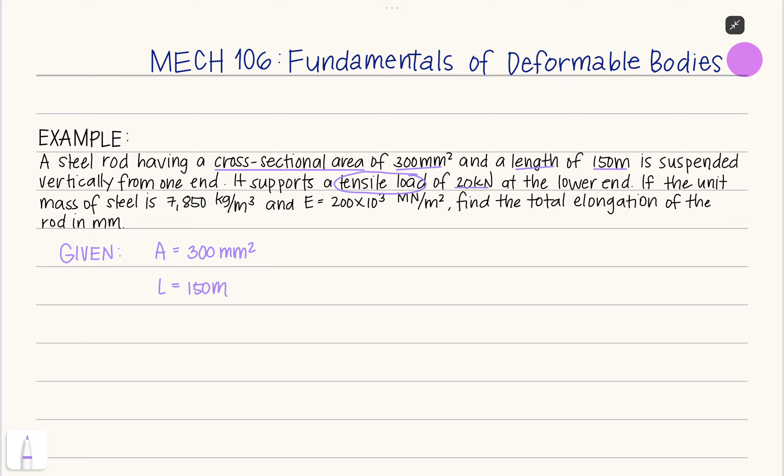It is suspended vertically from one end. While reading this, try to imagine the rod. It is suspended, and it supports a tensile load of 20 kilonewton. So this is obviously an axial load, it could be tensile or compressive. For this one, it's a tensile load, denoted by P. So P is equal to 20 kilonewton.

If the unit mass of steel is given as 7,850 kilogram per cubic meter, that unit mass, or what we call density, is denoted by rho. We have kilogram per cubic meter, which is mass per volume, so that is density. So rho is equal to 7,850 kilogram per cubic meter.

And also, the modulus of elasticity is given, denoted by E, equal to 200 times 10 raised to 3 mega. Newton per meter squared is Pascal, so let's just put mega Pascal.

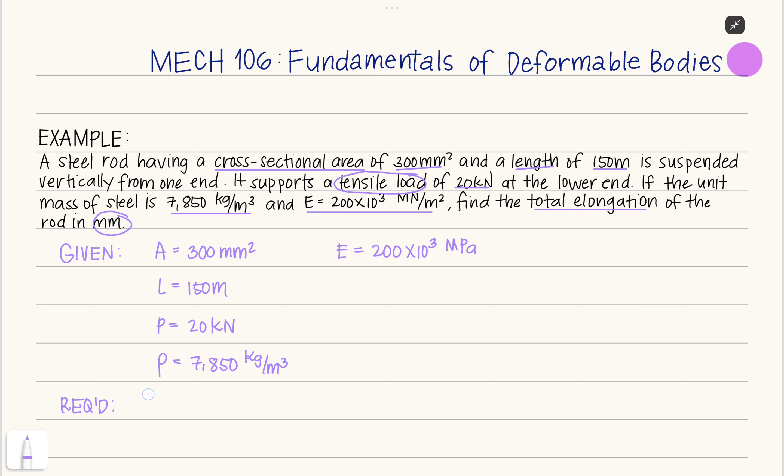Find the total elongation - this is now the required. We need to get the total elongation of the rod, and take note that it should be in mm. So our required for this problem is the total elongation, or deformation, denoted by this symbol. Let us denote this as total elongation of the rod, in mm.

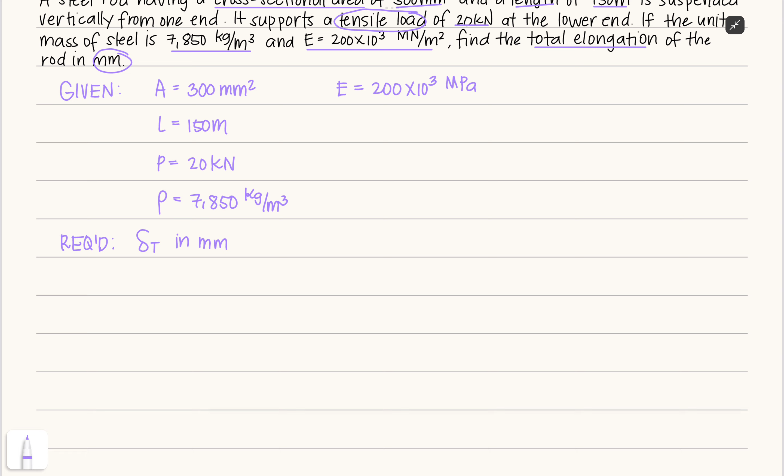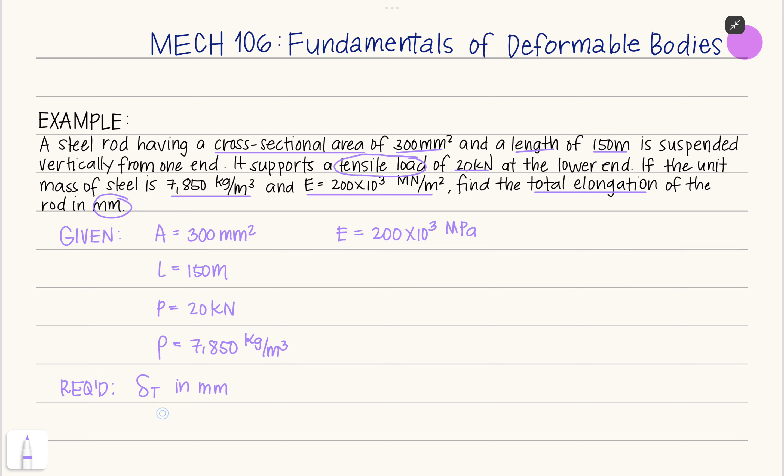From the term total elongation, we can infer that the cause of elongation might not just be one - it could be two or more. That's what we want to determine, so we know what our working equation will be. So for our solution, the total elongation is equal to whatever causes the elongation on the rod. Let's try to draw it first.

What's being described here is like a suspended ceiling. So this is our rod, suspended - that's how it looks. Now, what could be the effect causing elongation on our rod? There is a tensile load, so that's one cause. Due to tensile load, this will be our force P, since it says the rod is suspended vertically from one end and supports a tensile load of 20 at the lower end. So we position P at the lower end - that is our tensile load P.

So therefore, for our total elongation, there will be an elongation due to the tensile load P - that's one. What else could it be? Another cause is the weight at the center of the rod. Take note, it's at the center. This is also a cause of elongation, due to its own weight. So we add these together to get the total elongation, due to the tensile load and due to its own weight.

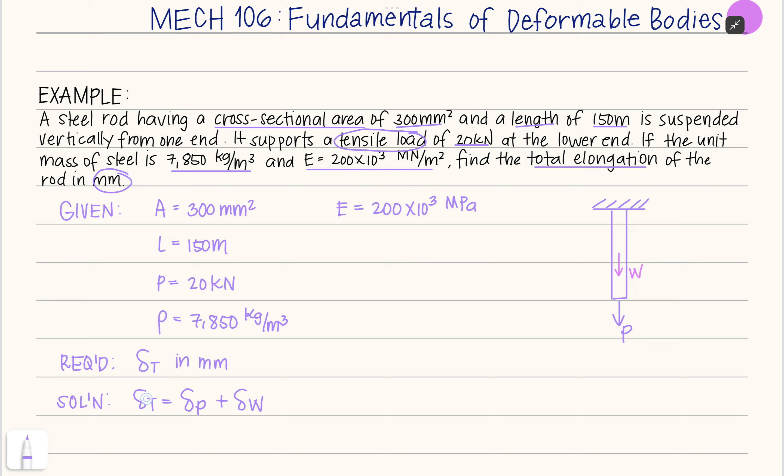If there's no other cause of elongation, then this will now be our working formula for this problem. Since this is our working formula, we will utilize the formula - deformation is now equal to PL over AE. That will be our working formula.

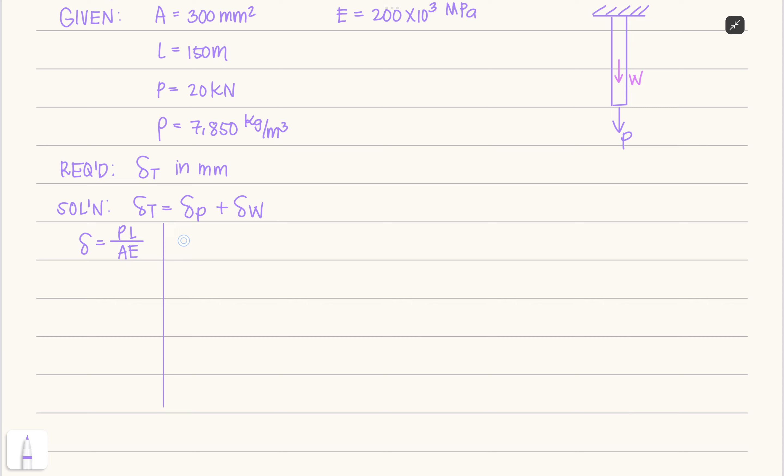So now, to get the value of the total elongation, first we need to know the value of the elongation due to the tensile load and due to its own weight. Let's start with the elongation due to its own weight first, denoted by this symbol.

So, ito muna yung kukunin natin and that is denoted by deformation W. So, let's utilize this formula. Ibig sabihin, kapag due to its own weight, yung magiging formula natin para specific, that is now due to its own weight is equal to yung magiging force natin. Okay, so ito, yung figure natin, ano na siya? si W na, tama? So, W na yung force natin, and then syempre, yung length natin over area, and then modulus of elasticity, E.

So, from here, tignan natin si L, given naman na. So, we have no problem for that. And also, A is given, also E is given. So, yung problema na lang natin para masolve natin yung deformation due to its weight is the weight itself.

Okay, so ano yung formula natin for the weight? Solve for weight W. Di ba we know that weight is equal to mass times the gravitational acceleration G. Pero yung problema natin, sa given na to, wala tayong mass and G, wala naman tayong problema dyan kasi we know that G is equal to 9.81 meters per second squared, that is constant. So paano natin malalaman kung anong M natin? Wala naman siya dito sa ating given. So kailangan natin i-utilize ito or gawan ng paraan para may makuha tayong mass.

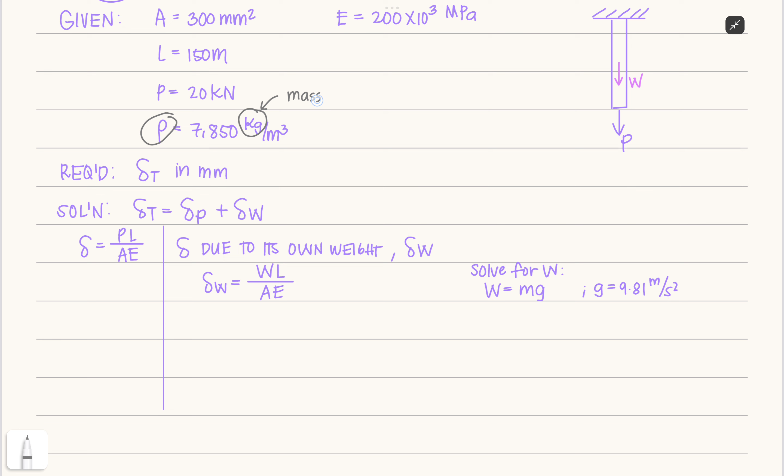Or if ever man, let's try to look at our given by unit analysis. So yung rho natin, di ba, kung titignan natin kahit wala tayong makita na M dyan, we know that yung kilogram is a unit of measurement for mass M. Tama? And then yung cubic meters natin is a unit of measurement for volume V. Therefore, from that, we can generate an equation that rho is now equal to mass M over volume V. Okay, so from that, may nakita na tayong M, which is yun yung kailangan natin dito.

So by cross multiplication, M now is equal to rho times the volume V. But then again, may problem ulit tayo kasi kapag ito pinag-in natin dyan, wala pa din tayong value ng V kasi nga walang given dito. But again, there is an area and length.

Therefore, by unit analysis again, di ba, pag kukuha tayo ng volume that is in the unit cubic meters. And if we say that area, unit of measurement for that is naka-square siya, so multiplied by meters, we will generate cubic meters. Okay, nagigets yun? So yon. So that is now equal to, by that, we can now say that mass is equal to rho, and volume is just a product of area and your length L. So from here, may M na tayo which is equal to rho A times L, and all of this are given na.

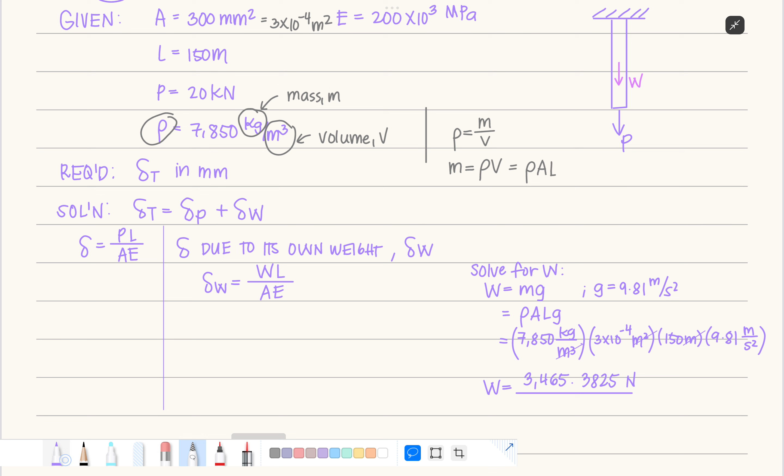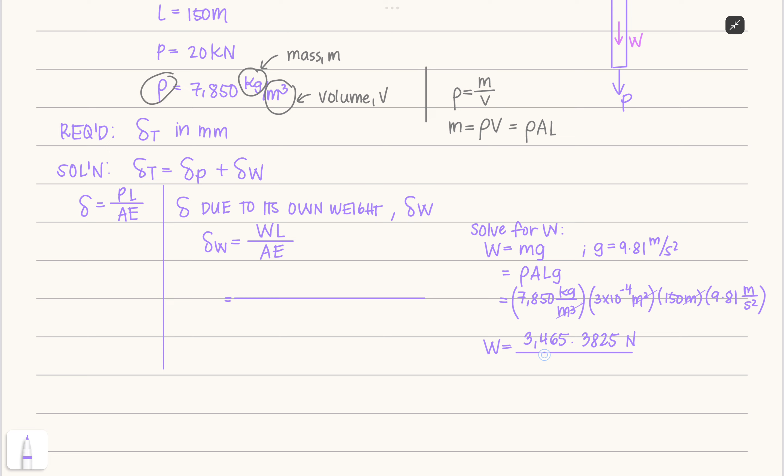So, eto, since nakuha na natin siya, plug in na natin dito for us to know the value of the deformation due to its own weight. So plugging in here is now equal to, so W, plug in natin dito, 3,465. Okay, so dapat naka-Newton siya.

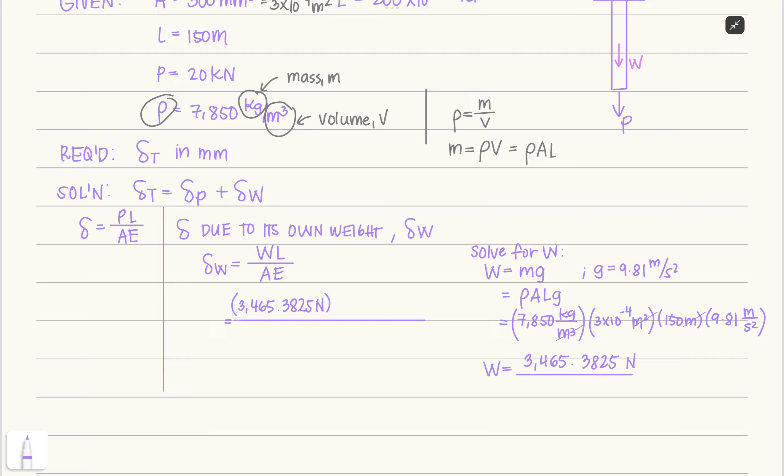3,465.3825 newtons. Then, length. Si E, ito, si modulus of elasticity, naka-megapascal. Diba yung convention natin ng unit of measurement, kapag megapascal ito, si force natin should be in Newton, tapos si area natin, dahil stress is equal to force over area, yung area natin is in mm squared. So that will be equivalent to megapascal.

So dito sa length natin, dapat i-convert natin si 150 meters. Pero wait, before that, si length na 150 meters ba yung gagamitin natin dito when we are considering weight? Yun yung question.

Kung itratry natin i-drawing, what will be the effect doon sa rod natin? Ito yung ceiling natin, for example. So try to draw yung magiging itsura ng rod once na may weight siya, or due to its own weight, ano yung magiging itsura ng kanyang deformation.

Yung magiging effect niyan, dito siya magkakaroon ng deformation sa taas. Kung ito yung rod originally, ito si rod natin originally, so of course yung length niya is ito, that is equivalent to 150 meters.

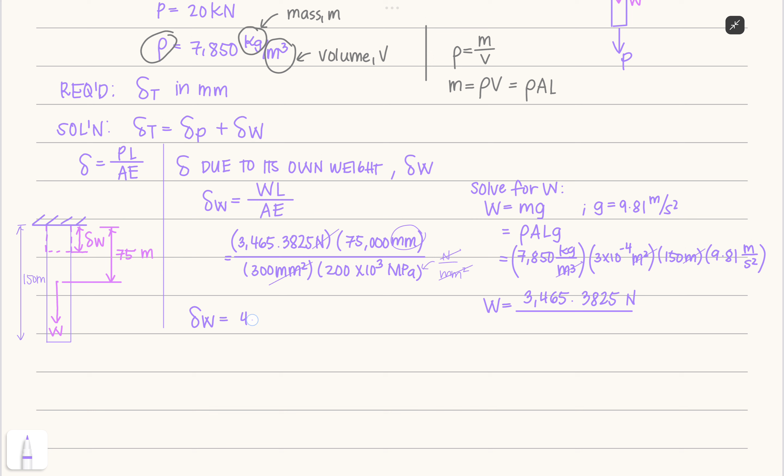Therefore, mm yung matitira. Kapag kinalculate na natin yan, ang magiging equivalent now ng deformation due to its own weight is now equal to 4.33 mm. Okay, yan pa lang yung due to its own weight, nakuha na natin ito. Kukunin din natin yung due to the tensile load para makuha natin yung required na total elongation.

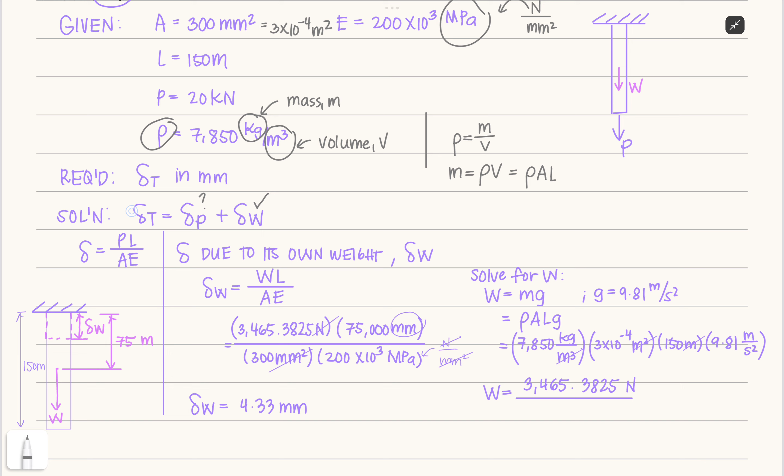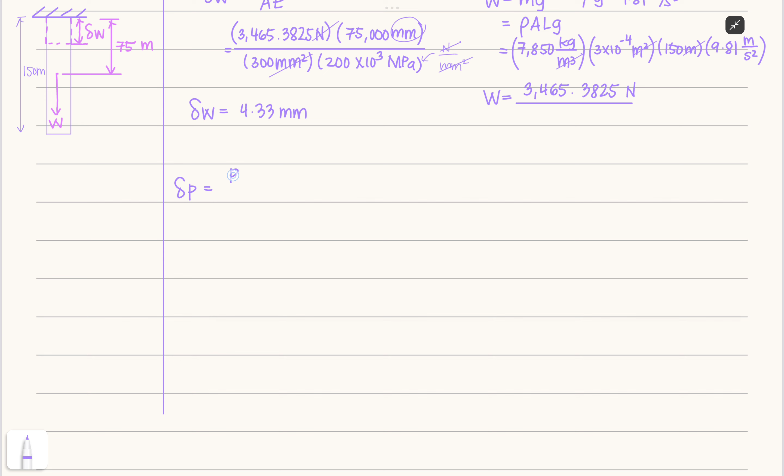Proceed tayo, dito naman. Let's solve for the elongation due to the tensile, that is of course PL over AE. Dito wala tayong problem kasi P naman is given, dapat maging aware lang tayo dun sa mga units of measurement na ginagamit natin.

So plug in natin si P, that's equal to 20 kilonewton, so this should be Newton, kasi yun yung mga unit of measurement conventions natin. Kilo is times 10 raised to 3 and then Newton.

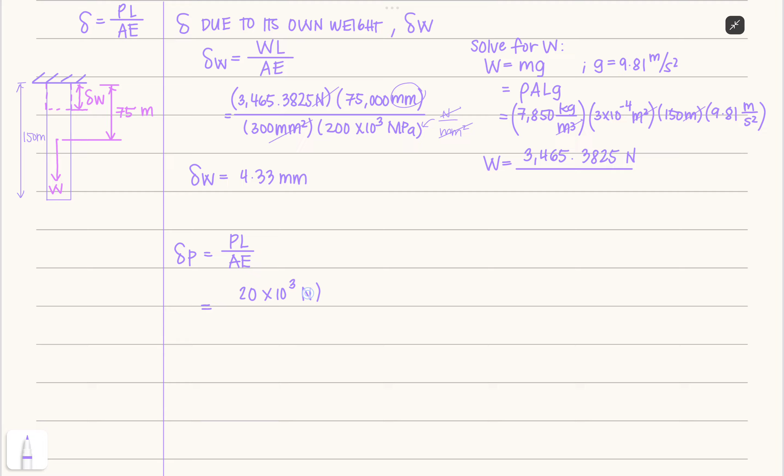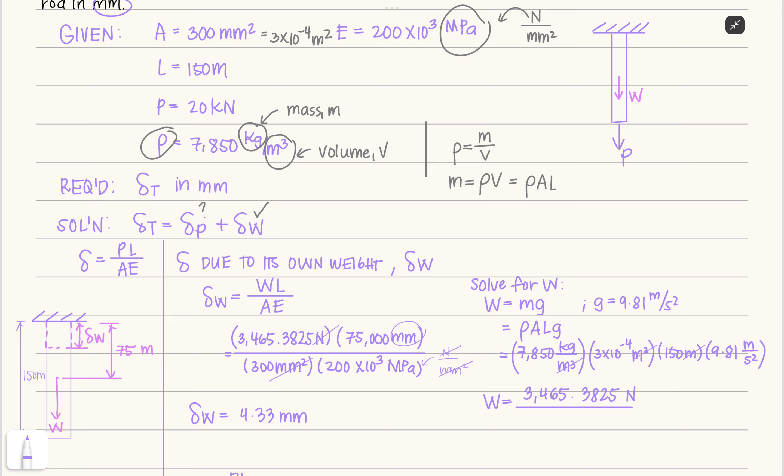So 20 kilonewton, and then L natin, this should be in mm kasi yung given na is megapascal para hindi na to i-convert natin. Just like kanina, naka-mm to. Yung gagamitin naman natin ngayon, try din natin i-illustrate. Kung ito, kapag due to its tensile load naman, dun sa tensile load, tanggalin ko lang to.

So kung ito, yung original rod natin, tapos yung i-consider naman natin is si, ito. So dito, at the end, dun sa problem, ito si tensile load natin. Tensile kasi palabas siya or pababa, okay? So yung magiging length natin na pipiliin, syempre ito. Kasi yung effect lang naman yan, dito siya mag-e-elongate. So parang dito, diyan siya mag-e-elongate.

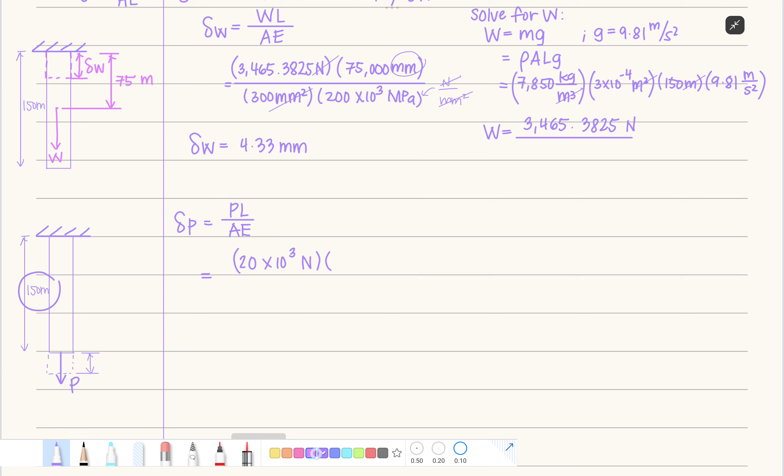So eto na si deformation due to the tensile load. Ibig sabihin, convert lang natin si 150 meters to mm, times lang tayo ng 1,000. So 150,000 mm, then all over A natin, walang nag-iba.

Since yun nga, we can apply that only to Hooke's law situation, and dapat hindi mag-change yung kanyang area, as per dun sa conditions natin na na-discuss in the previous lesson. So 300 mm squared, then yung E natin, that is 200 times 10 raised to 3 megapascal.

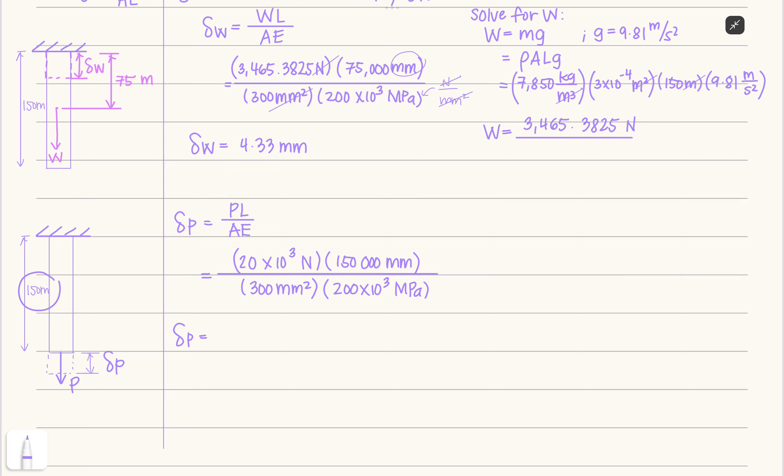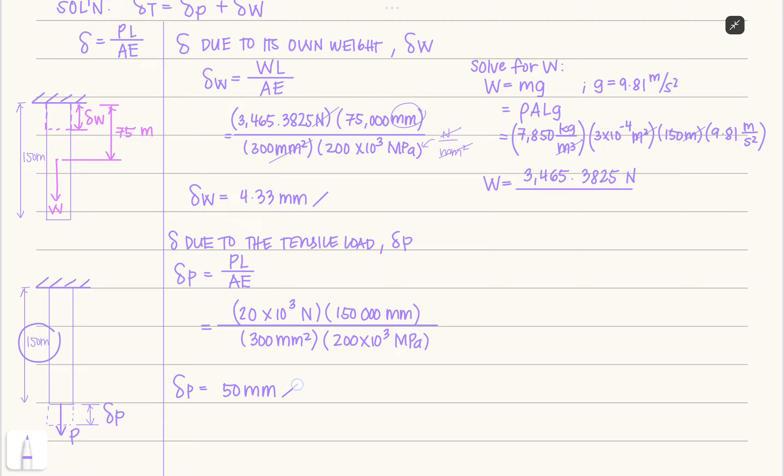So parang kanina, yung matitira dyan is in mm. So kapag kinompute natin, si deformation due to tensile load is now equal to exactly 50 mm. So since meron na tayong value ng due to its own weight, ito si deformation due to the tensile load.

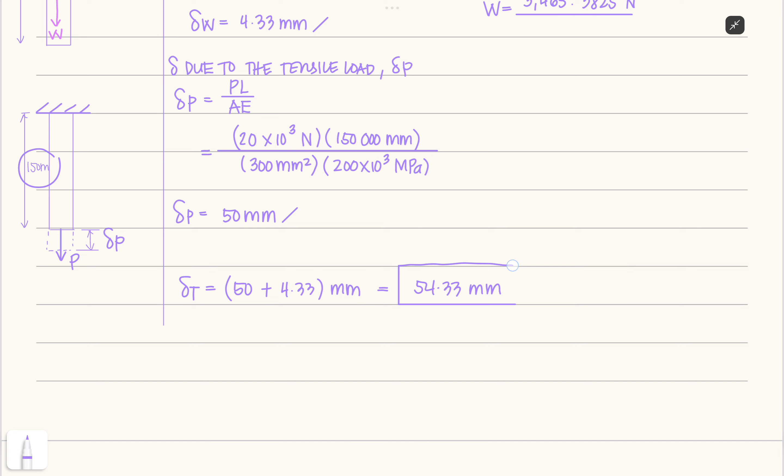And that is yan. Okay, so since nakuha na natin tong dalawa, we can now solve for the total elongation. So that's now equal to 50 plus 4.33, and this is both in mm. So computing that is now equal to 54.33 mm. So naka-mm na siya. So yan na yung final answer natin for this example.

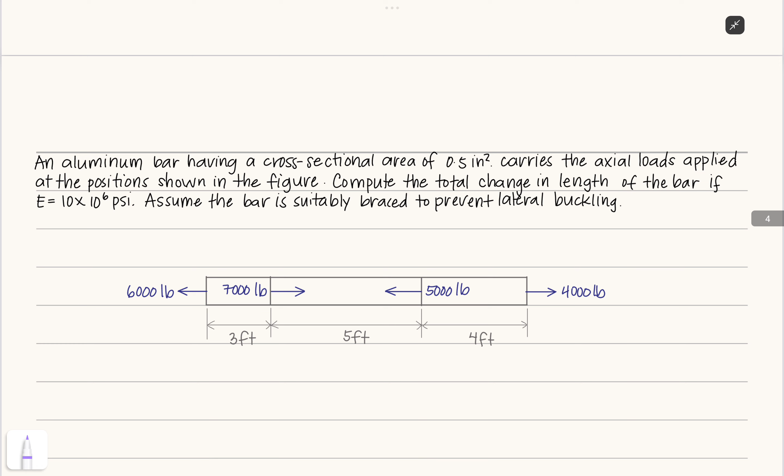Okay, so yun. Then next one, let's have another example. So dito naman tayo, sabi dito, an aluminum bar having a cross-sectional area of 0.5 inches squared carries the axial loads applied at the position shown. So yung sinasabi niya dyan, ito si 6,000, 7,000, 5,000, and 4,000. These are the axial loads na na-apply na sinasabi dyan sa problem. Then let us compute the total change in length.

So wag tayong malito dun sa mga terms. Let us familiarize na kapag sinabi nating deformation, change in length, same lang yung mga yon. So change in length of the bar if E is equal to 10 times 10 raised to 6, PSI, pounds per square inch. Assume the bar is suitably braced to prevent lateral buckling.

So kunin muna natin yung mga given sa problem na to. Sabi doon, 0.5 inches squared, and that is the cross-sectional area denoted by A. So A is equal to 0.5 inches squared, carries the axial load. So ito yung mga yon, yan na yan as per in the figure. Then also E is given: E is equal to 10 times 10 raised to 6 PSI, or pounds per square inch.

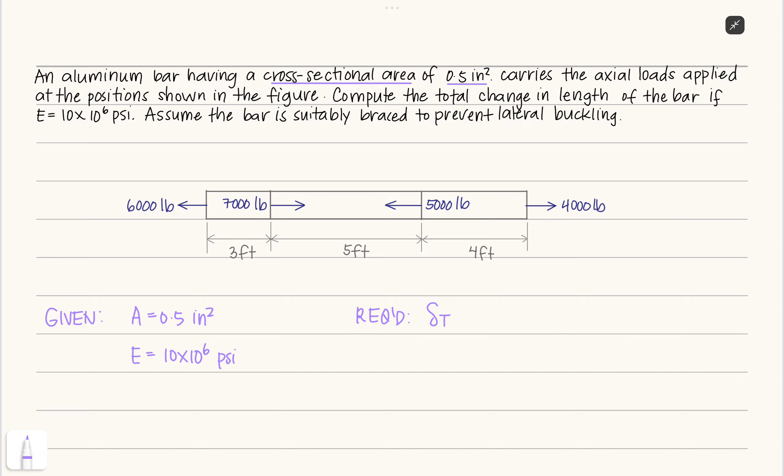Then yung required sa problem na to is the total change in length. So again, total, that is total change in length. So kung titignan natin sa formula, yung magiging working equation natin, di na tayo lalayo dun sa formula natin.

Ayan, so dito tayo mag-i-start, gagamitin natin to. Kung titignan natin sa figure, tama naman yung na-discuss natin under the conditions of Hooke's law na sabi doon is homogeneous, which is aluminum siya all throughout. So sa part man na yan, yung 3 feet na yan, 5 feet, and 4 feet, aluminum bar iyon. And then hindi siya nag-change ng area, which is all throughout 0.5 inches squared siya. Okay, so ngayon, ano yung magiging total change in length nito?

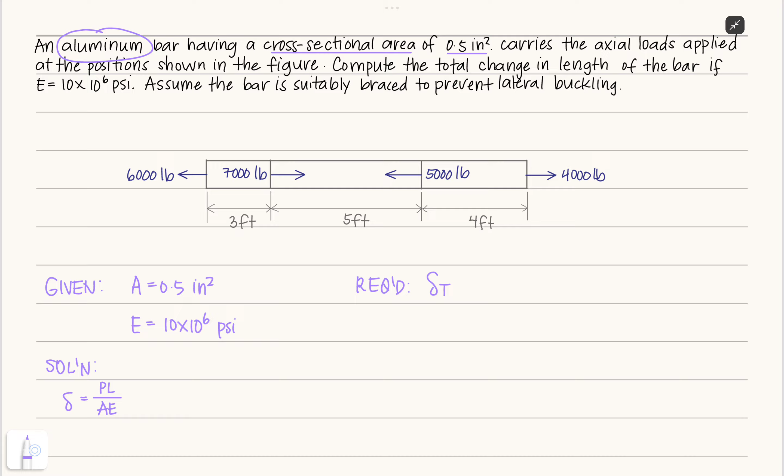So yung P natin dito, we need to know the internal forces dito sa each material natin. So per measurement, 3 sa 3 feet, 5 feet, and then 4 feet. So there are 3 portions, tama? So yung magiging equation na natin for us to get the total, since 3 parts yan, that is now deformation at 1 or at 3 feet plus deformation at 2 or 5 feet, plus deformation naman at 4 feet or that is 3.

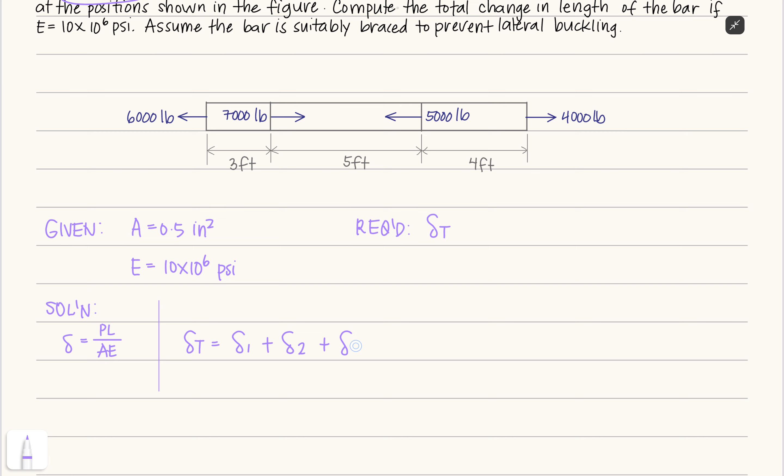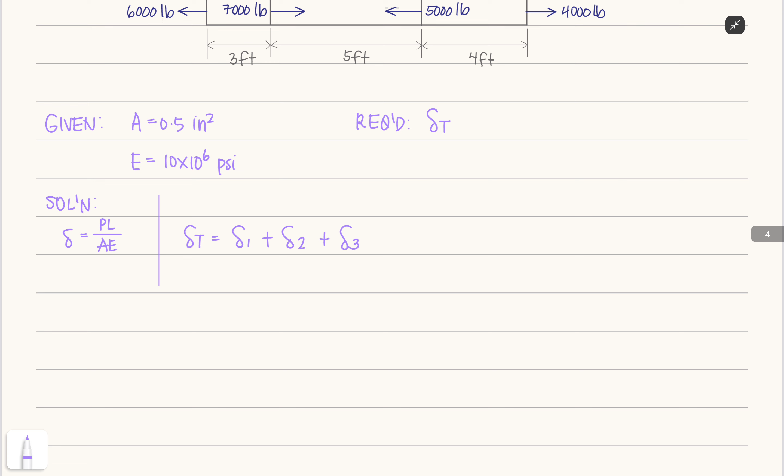Okay, so ngayon, compute muna natin each. Pero paano? Dito sa P natin, as per dun sa sinabi ko kanina, kailangan natin ng internal force. Okay, so kung titignan natin, unahin natin solve for deformation at 1. Kung try natin yun i-draw, so ito siya, dito sa figure na to, diba magkakaroon lang tayo ng internal force dun sa discussion natin in the previous sa axial or normal stress by cutting here. Tama?

So kapag nag-cut tayo dyan, tas try nating kunin yung isang part dito. Di na natin papahirapan sarili natin. Dito tayo kukuha sa side na to, dyan sa side na yan. So yung magiging itsura niyan ngayon is eto, diba? Eto yung portion.

So unahin na natin yung cutting plane. Ito yung cutting plane natin. Ito yung ginawa natin dyan. And since dito natin kukunin sa left side niya, para mas konti yung i-consider na forces, ganito na yung magiging itsura. So review na lang to kasi na-discuss na natin to sa previous lesson. Yan siya, diba? Ganyan yung magiging free body diagram niya.

And there is, tawag nun, load dito. Ay sorry, wait. So may load yan na 6,000. Lagay lang natin to since yung left side yung kinonsider natin. And dito na, sa portion ng cutting plane tayo, magkakaroon yung sinasabi natin na, tawag doon, internal force. I-denote natin siya, dito na lang. Again, depende doon sa direction, okay lang, as long as dun sa huli malaman natin kung tension siya o compression. So this is now, let's say, denote natin as P1.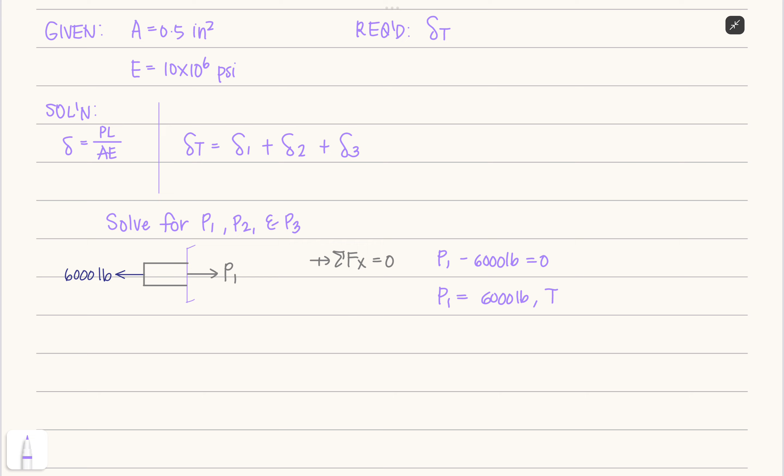Okay, so another is P2. Na-solve na natin si P1, so okay na siya. How about si P2? Ano naman si P2? So eto siya, di ba sa P2, dito tayo magfo-focus sa 5 feet.

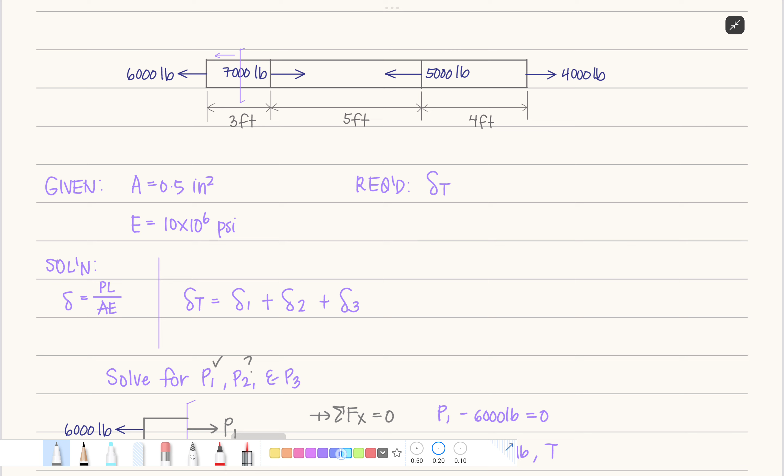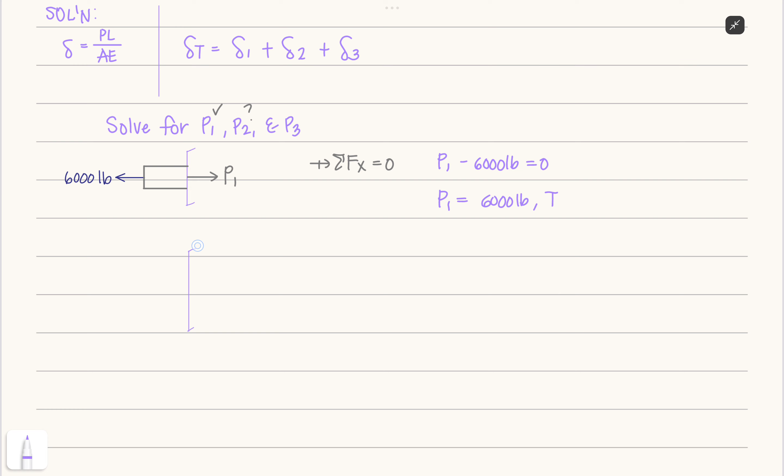So gawin ulit natin yung mag-cut para makakuha tayo ng internal force. Dito tayo mag-cut. Dito, okay lang kung sa right or sa left, parang same lang naman yung magiging effect. Dito na lang sa, tawag doon, sa left ulit. Kung yan yung magiging section natin, draw natin yung FBD natin. Since left yung kinonsider natin, etong portion na to, from here, papunta dito.

Ano siya? Ito si, extract lang natin. Same lang naman yung area. So eto, ganyan. Ano yung nasali? 6,000 pa din, may 6,000 pa din dito. So wait, hindi siya kasi. Eto, yan, si 6,000 pounds.

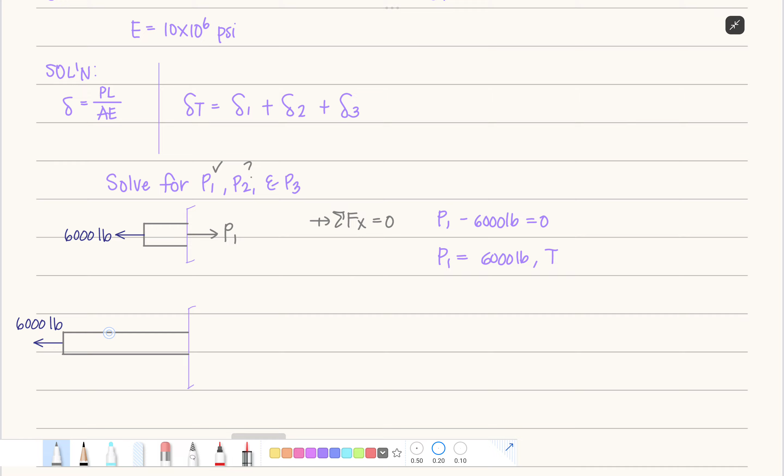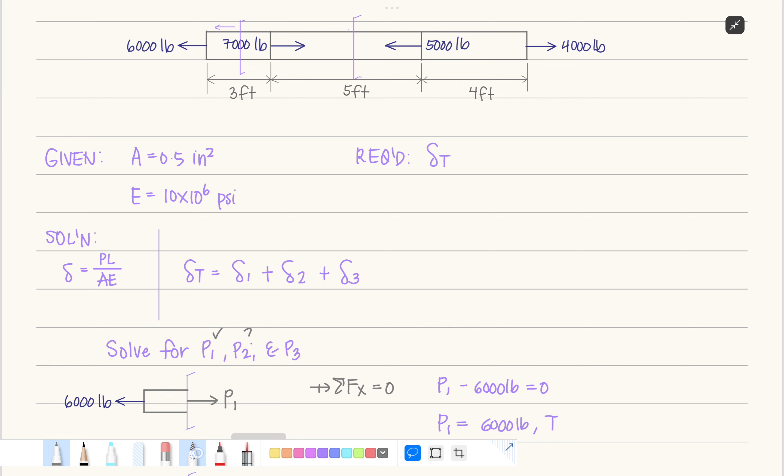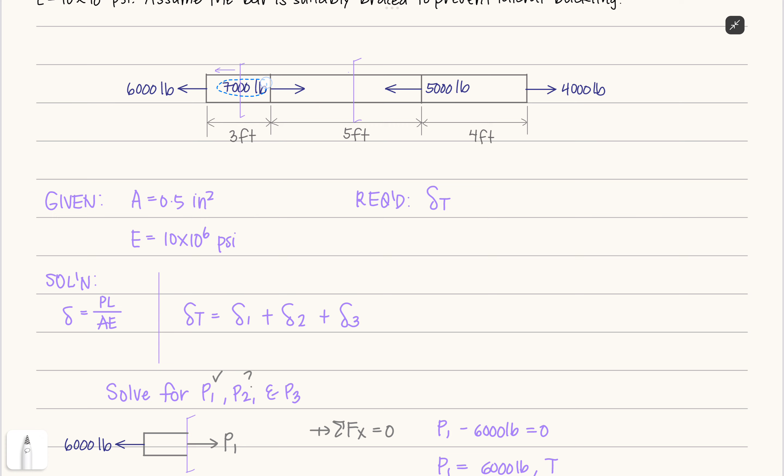Yan na siya. Then may makukuha pa tayo kasi itong portion lang na to is si 3 feet. 3 feet yan, diba ito? Itong left niyan. And then there is 7,000 pounds din. So 7,000 pounds, copy ko na lang. 7,000 pounds, dito na lang siya, diba? Yan, 7,000 pounds. Lagay natin dito. Ito na yung na-consider natin na FBD for the second one.

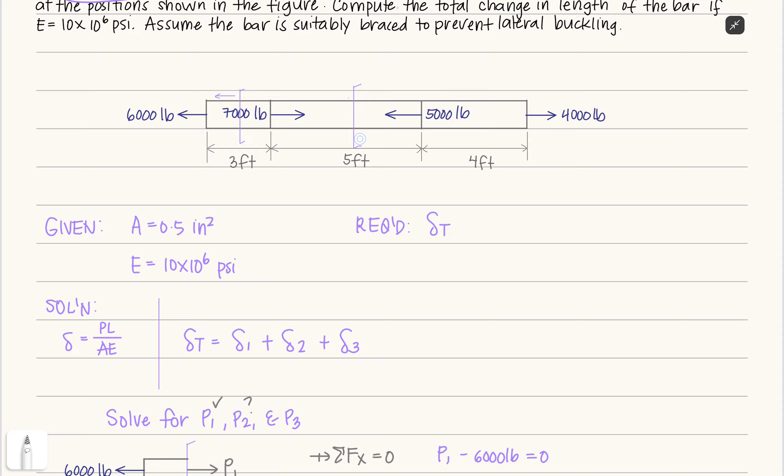Okay, yan na siya. Ibig sabihin dito sa cutting section natin, dito makakaproduce ng isang force or internal force. Say sabihin naman natin na ano siya, compression. So this is P2, for example. Again, along X lang ulit yan. We will have summation of forces along X equals to 0. Our sign convention, positive to the right.

Dito, kunin natin lahat ng forces. Unahin ko na si 7,000 since si 7,000 kasi pa-right siya, positive - 7,000 pounds. Then negative si 6,000 pounds, and then also negative si P2, that's equal to 0. So transposing P2, positive na siya. Yung matira, 7,000 minus 6,000, that is 1,000 pounds. And since positive, tama na compression ito, so that is C. Okay, nakuha na natin si P2.

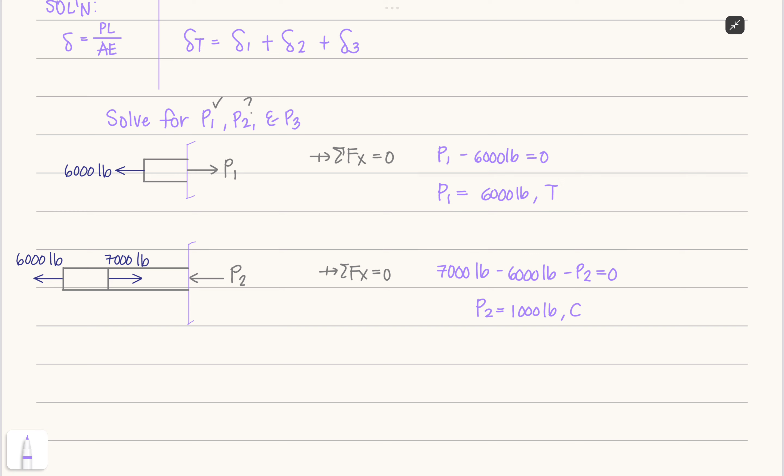For the last one, kunin naman natin si P3. Dito sa portion na to, itong 4 feet naman, dito tayo mag-cut. Wag na nating pahirapan sarili natin, etong right side na yung kunin natin, hindi na to, kasi kapag ito, buo yan.

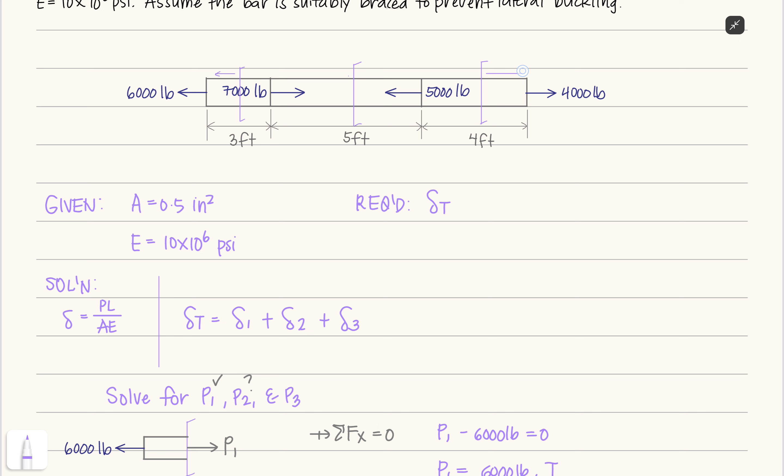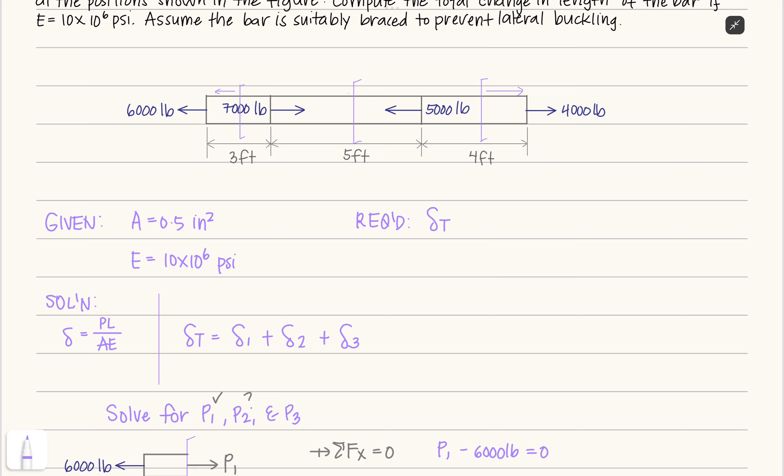Okay, so let's proceed. Let's do the right side. Start tayo sa cutting plane. So kung ito yung cutting plane natin, kapag kinonsider natin ito, yung right side, there is 4,000 pounds lang. Okay, so kunin natin yon.

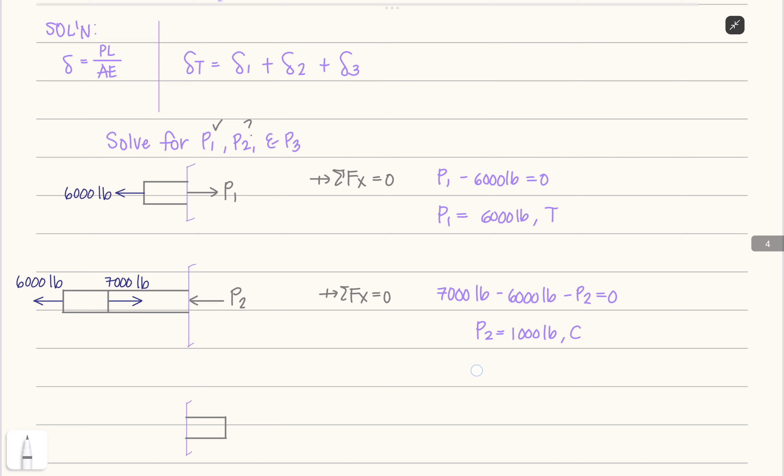That is now ito yung sa 4 feet. So yon, and there is 4,000 pounds. Kunin ko na lang dito. So 4,000 pounds dyan. And since there is a cutting plane here, again, may maproproduce tayo na internal force. So gawin natin na pa-outward since para positive kasi opposite lang dapat yan.

This is our P3. So therefore, from that, summation of forces along x equals 0, positive to the right. Kunin natin yung equation natin. Obviously, si P3, so 4,000 pounds pa right, pa left si P3, so minus P3 equals 0. So obviously, P3 is equal to 4,000 pounds. And positive, therefore, tension siya. So ayan, kompleto na si forces natin, internal forces.

P natin: 6,000 tension, 1,000 compression, and 4,000 tension. So balik na tayo dito sa working equation natin. From that, si total deformation is equal to deformation 1, deformation 2, and deformation 3.

Kung gagamitin natin yung formula natin, di ba this is, say, P1, para ma-identify siya, L1, kasi hindi parehas yung mga forces niya each section. Kaya nagkaroon ng 1 doon tsaka 1 din sa length kasi iba-iba sila. Nakita naman natin 3 feet, 5 feet, tsaka 4 feet. Kaya may subscript tayo dyan. But yung good thing is same lang si area, kaya hindi na ako magkakaroon ng subscript dyan, kasi same lang sila sa 1 man, sa 2 man, or sa 3.

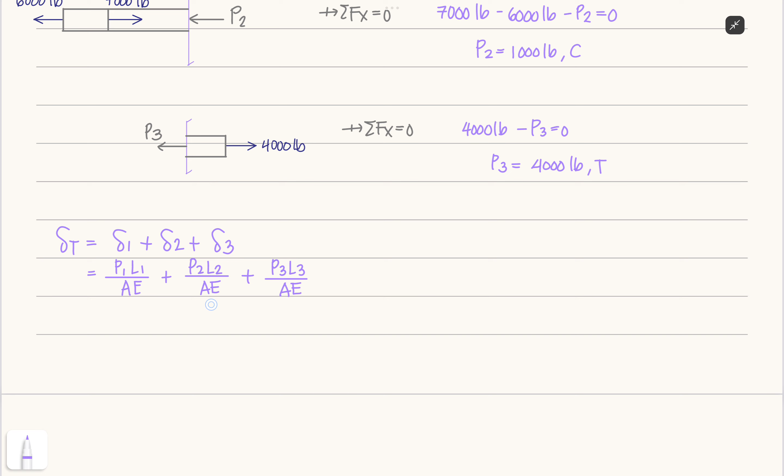Okay, so plus P2 L2 over AE, area times modulus, plus P3 L3 over AE. Since common factor naman si A over E, or AE, yung magiging ano na natin dyan, that is now equal to P1 L1 plus P2 L2 plus P3 L3 all over AE. Para yung input natin sa calcu, iisa na lang to. Hindi na tayo magdodoble or triple pa.

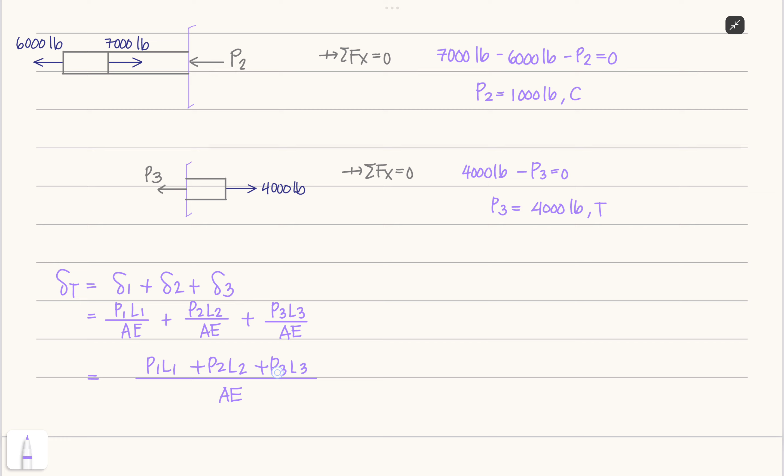Okay, so since kompleto na tayo, I think, kasi P1 nakuha na natin, P2 and also P3. Tapos yung length naman is given na, 3 feet, 5 feet, and 4 feet. Tapos area and modulus of elasticity is also given dito. So we're now ready to solve for the total.

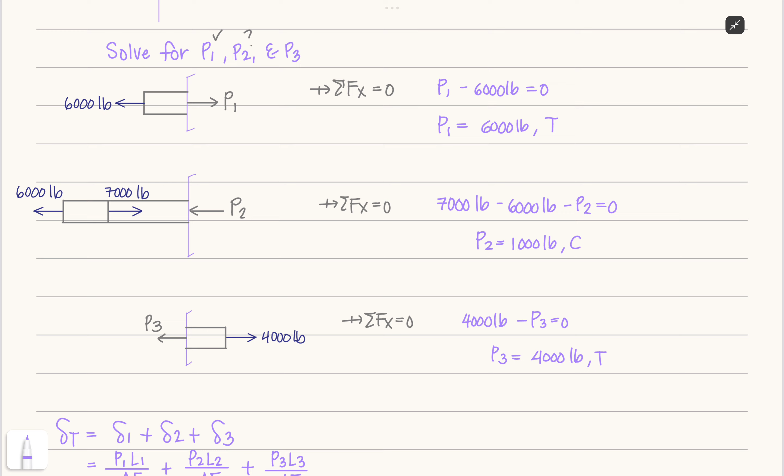So plugging in all the values, equal now to, so yan, P1 is, ano yung nakuha natin? 6,000. So may bearing to ha, kung tension, kung compression, kasi di ba may sign convention tayo na kapag, ano siya, to the left, that is compression, so that is minus. Since tension yan, positive, so 6,000 pounds, multiplied by length 1. Si length 1 natin is 3 feet.

So naka-feet siya, so ito yung very important. Kaya naglalagay tayo ng unit of measurement. Kung 3 feet yan, multiply lang tayo ng 12, kasi 12 inches is equivalent to 1 foot. Para mag-cancel yung feet doon.

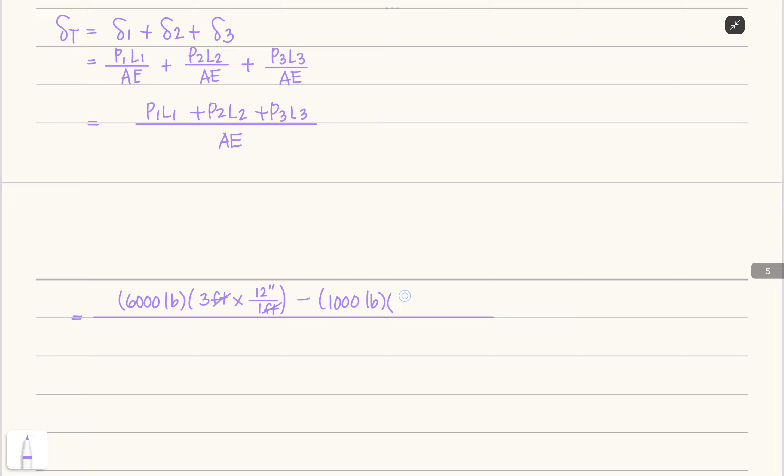Okay, so plus P2 is, ay compression pala, so therefore minus dapat to. Minus, ilan? 1,000, so 1,000 pounds. And again, naka-feet to, that is 5 feet. So multiply ko na lang, 5 feet times 12, para diretso na.

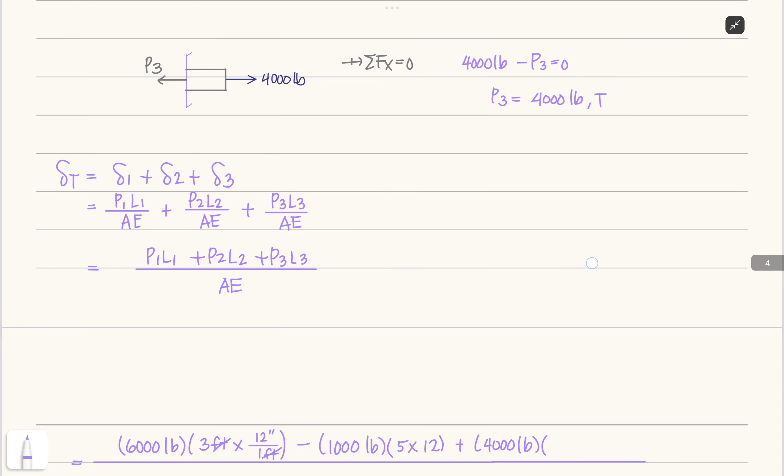And then si P3, tension, that's why this is plus. Plus 4,000, so 4,000 pounds. Then yung length niya, L3, so dito na tayo. L3 is equal to 4 feet, so multiply natin ng 12 para maging inches. So 12. Then A now.

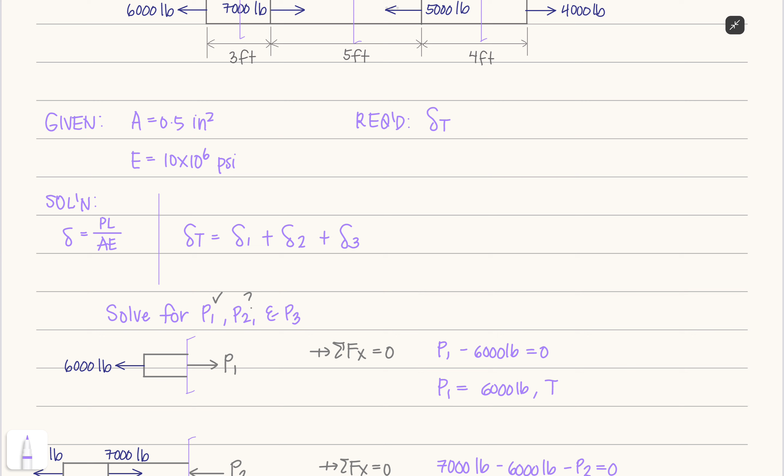Ilan yung A dito? 0.5, so inches, wala tayong problema, and PSI na yan. So 0.5 inches squared, then 10 times 10 raised to 6. PSI is pounds per inches squared.

So kung titignan natin yung mga unit of measurement natin, magka-cancel iyan. Then lahat ng pounds, dahil may pounds dito. Then yung matira na lang, these are all in inches na.

Okay, therefore yung final na magiging answer natin na dito, yung total deformation now is equal to, compute natin to, and our unit of measurement will be inches. So computing this one, yung makukuha natin is 0.0696 inches, okay, inches. Then since positive yan, yung maging effect nito, di ba deformation, pwede namang hahaba, pwedeng iikli, so dito, since positive, yung effect niyan is hahaba or lengthening. Okay, so this is now our final answer.